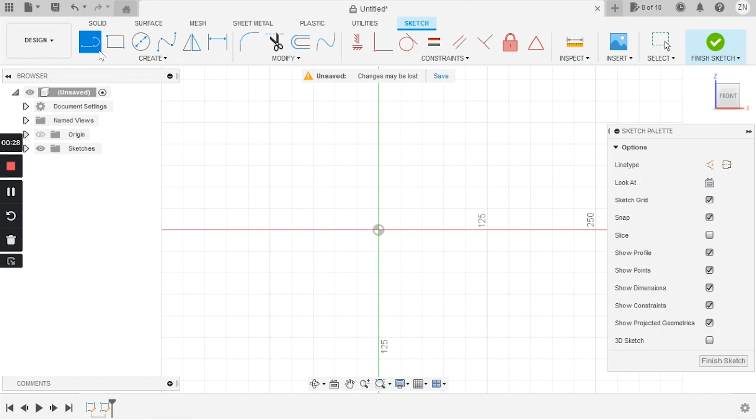Once this is done, we're going to convert that line into a construction line, and now we can center that line with our origin point and give it a dimension of, let's say, 90 millimeters. Once our construction line is centered and measured, we can finish the sketch. Okay, so once we have our center line down and our dimensions measured, I'm gonna add a nice picture of a lighthouse on the front plane. So let me show you the way we do this.

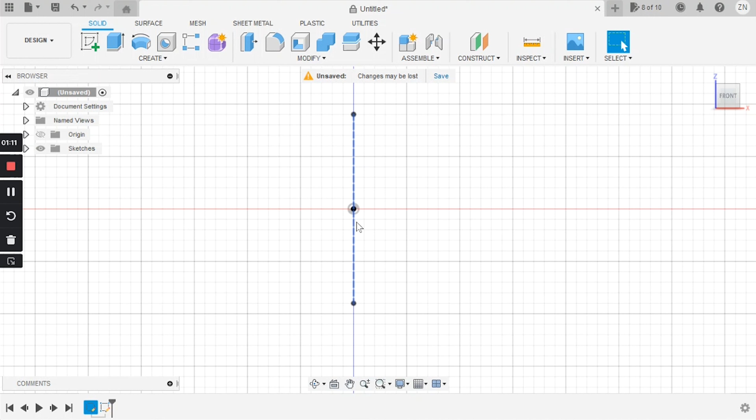On the front plane, the way we do this is by going into our insert option on the main tool tab and selecting insert canvas. This is an incredible tool that allows you to bring a picture right into your workspace that we can use as a reference to model our part around. Once we choose the picture of the lighthouse we want, we have to let Fusion know where to put it. And we do this in this instance by picking the front plane just like with a sketch.

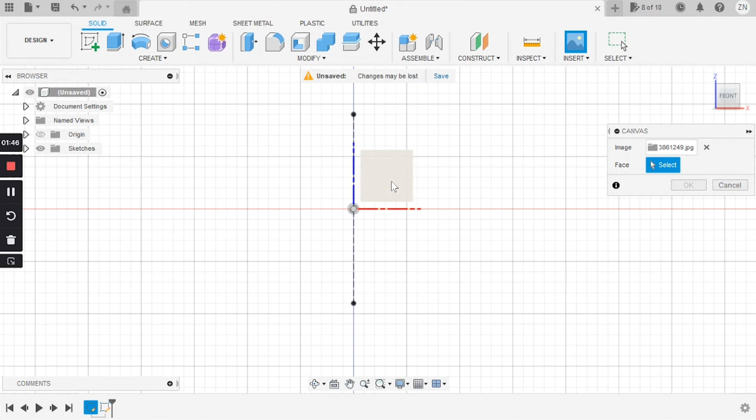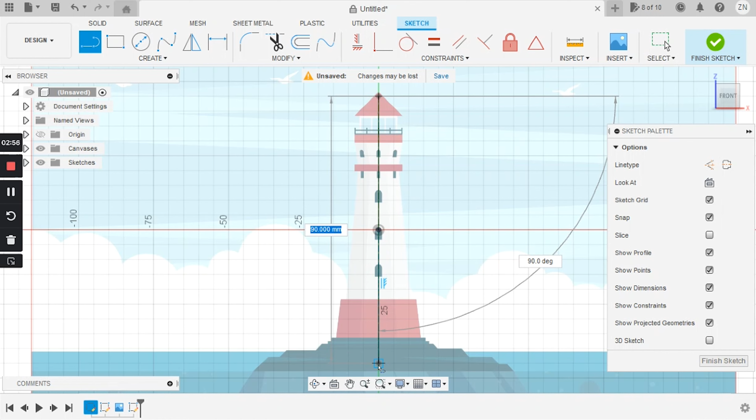Once that's done, we can drag and scale the image so the lighthouse matches the dimensions we set with the construction line. And now we can open a new sketch on the front plane and start out by drawing a line right down the middle, right on top of our construction line. This is going to be the axis we use to spin the profile of the lighthouse we're about to trace around. And once that's done, we can start tracing out the profile of the lighthouse using the line tool. I'm going to speed this part up.

It's important to remember two main things at this point. The first is that you have to make sure the profile of your sketch is closed, meaning there's no gaps between all those little lines we drew, because I tend to find that's the #1 reason your profile won't extrude or revolve. Because if you don't have everything connected right, or you're missing a line somewhere, Fusion is going to give you some problems. Once we have our profile sketched out, we can 3Dize it by choosing our Revolve tool and picking our axis, which is of course the line we drew at the beginning, down the center of our sketch.

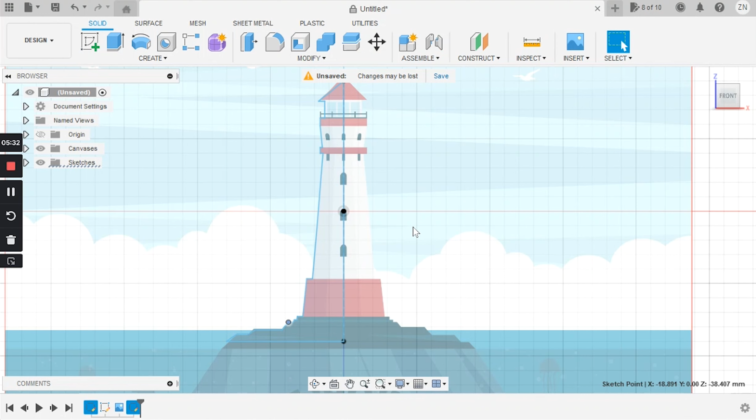Once we finish tracing the lighthouse profile, we can finish the sketch and choose the Revolve tool from our Create toolbar at the top. Then selecting first the axis and then the profile we sketched out of the lighthouse, and ta-da! We have a 3D model.

At this point, I want to get a better view of the model, and the canvas image of the lighthouse is kind of getting a bit in the way. So let's take care of that. The easiest way to do this, I find, is by selecting the canvas in our history tree at the bottom left of our workspace and double-clicking it, and the edit feature option window for the lighthouse image should pop up.

And in the options window, we can see the canvas opacity option. If we drop it to 0, our lighthouse image disappears. And now we can see the model much better. So at this point, we're basically done the main body. But of course, there are some essential details we've got to get right, specifically the windows. And for this, we're going to use a few awesome new tricks. So let's jump right in.

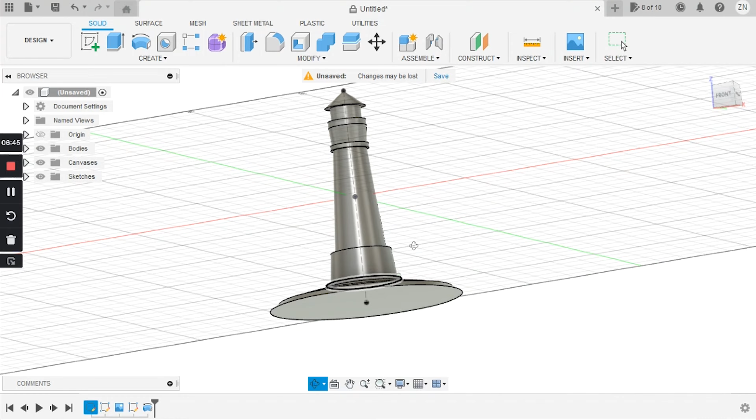Okay, so at this point, now that we saw the main outline of our model and it looks good, we still need the details. So for this, we're going to bring back the opacity of our lighthouse image by going back to our history tree and essentially reversing our last step. Once we can clearly see the windows, we can start a new sketch on the front plane and pick the lowest window to trace out.

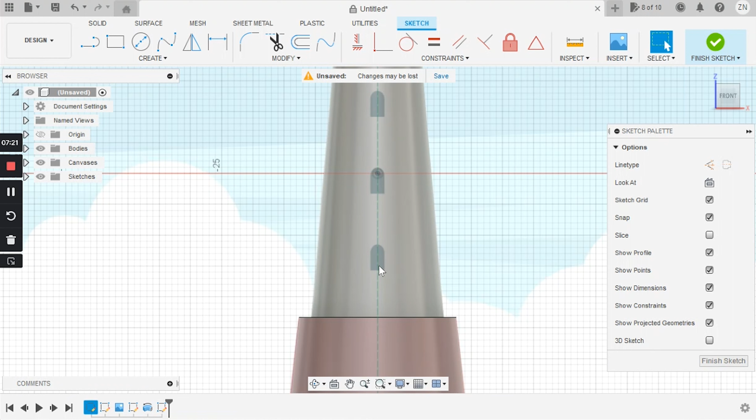For this model, it doesn't have to be perfect, but it's important that the window is symmetrical. So I'm going to draw a line down the center of the window and trace out only 1/2 using the line tool. We see that the top of the window is arched. So to get this done right, I'm going to go to the create drop-down menu and hover over the arc option. This is going to give us a few different arcs we can use for our sketch. But for now, we're going to pick the 3-point arc.

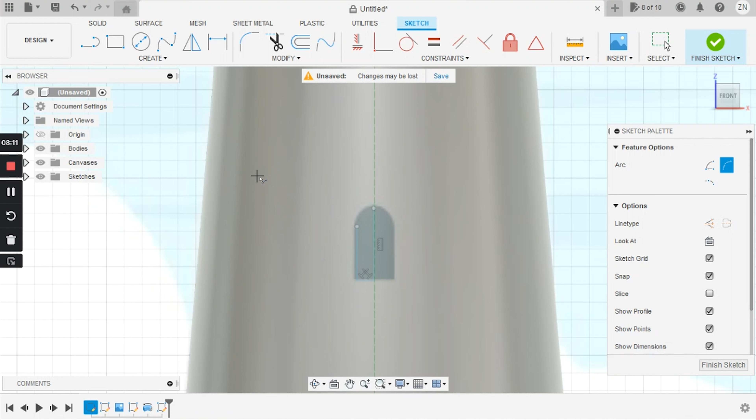This is an awesome tool that will let us draw an arc between 2 points and let us dial in the radius with the third. For the first point of the arc, I'm going to select the top of our window profile line and the tippy top of the midline. And now if we move the arc around, we can feel an almost tactile kind of click when the tangent levels out. This is where we're going to click the mouse and make the third point, because now we can easily mirror the profile we just made to make a perfectly symmetrical shape.

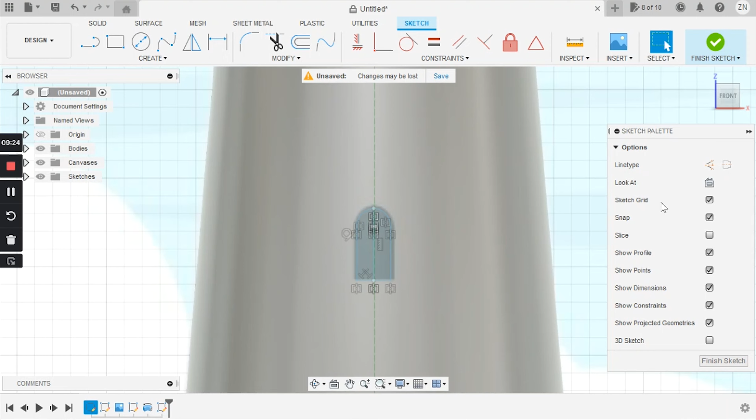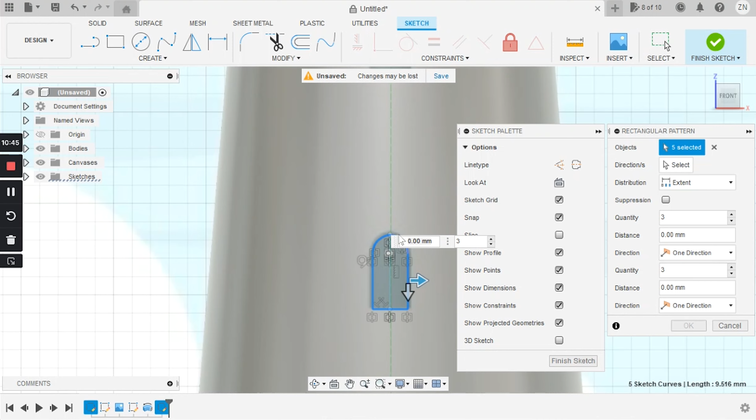And our two different style windows are mirrored up. We can now use the rectangular pattern tool we can find under the create option. And using this tool, we can copy the sketch we just made along a path. Or alternatively, for the purpose of this video, we can drag it along with the arrow that popped up. You can choose how many instances are copied and how far they are from each other.

For right now, we're going to drag out 3 instances of the window and match them up to the picture using the arrow button. Once this is done, we can finish the sketch and move on to finishing up the lighthouse. At this point, we have most of the lost Benchy lighthouse, and all we have left is some finishing touches, which brings me to my next important point.

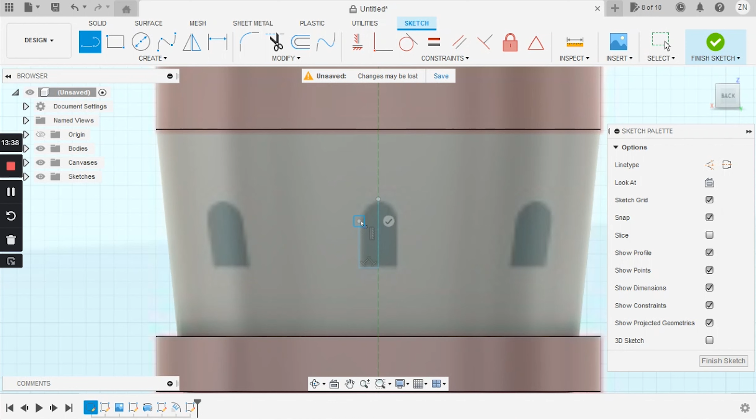Once the windows are engraved, now we can sketch out the window on the upper portion and repeat the process we did in the previous segment. Let's speed that one up and get on with the part.

Okay, so at this point, you have likely noticed a big flaw. With the lighthouse, we only have windows down one side. It's a circular object. I don't know how it has a side, but down one side. And you can probably figure out the ongoing trend in CAD, and thus the way we're going to fix this issue, which is a very good sign. And of course, you're probably right. Big surprise, we're going to be using a pattern.

It's important for me to point out that this feature, the mirror feature, and pattern features in general, are in my humble opinion the gateway to really understanding the power CAD software has to offer, and the stepping stone to mastering 3D modeling. Once you get the grasp of making models based on repeatable geometry, whether it's the mirror feature or the pattern features, it's definitely going to unlock a lot of the power this software has to offer. But anyway, let's jump back into Fusion, and let me show you how to get this done.

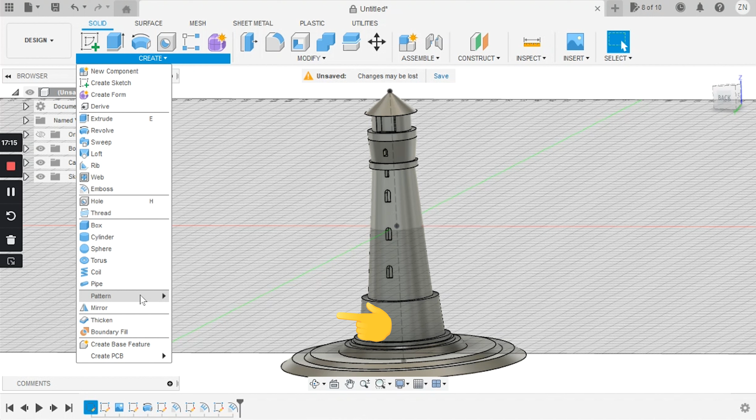Once we have all of our windows embossed and aligned down the middle of our lighthouse on the front plane, we have an incredible tool we can use in CAD, and that is the circular pattern tool. The way we get this done is we go down to the pattern option in our create menu in the toolbar. And with this in hand, we can select the features or bodies we want to make a pattern with. In this case, it's the emboss feature we want to pattern.

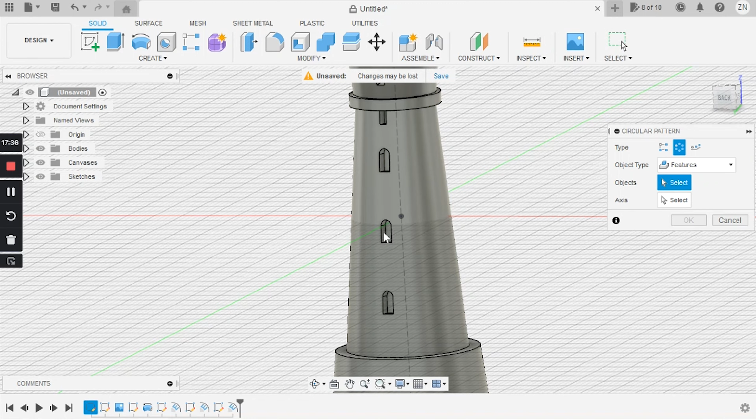So in the options window that popped up on the side, we're going to select the feature option in the object type menu and click on one of the faces of the windows we cut out with the emboss feature. And once that's done, we have to choose an axis to spin the pattern around. And for this, we're going to pick one of the circular edges surrounding the model to spin the pattern around.

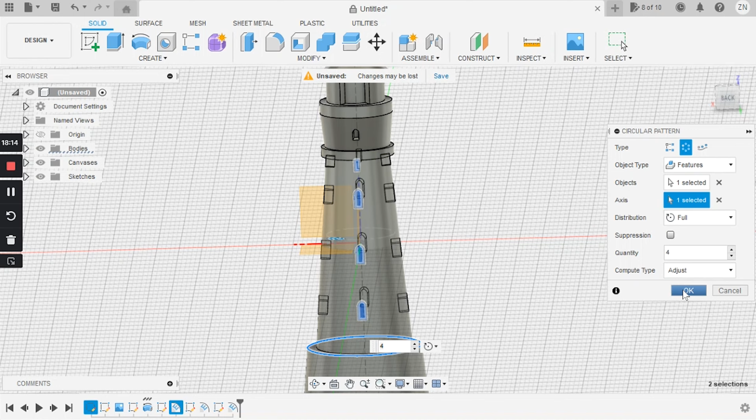Once that's done, we can do the same process we just covered for the upper middle section of our tower, but I'm going to add 6 instances instead of 4. And using the same technique, I'm going to add some detail to the upper portion of the lighthouse, some large squares. And with that, we can save the model, export it to an STL, and send it off to the printer.

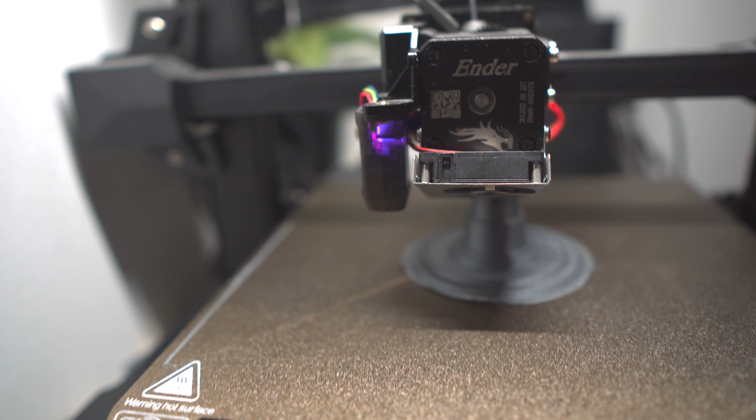And with that, we're done modeling a lighthouse for all those lost Benchies out there.